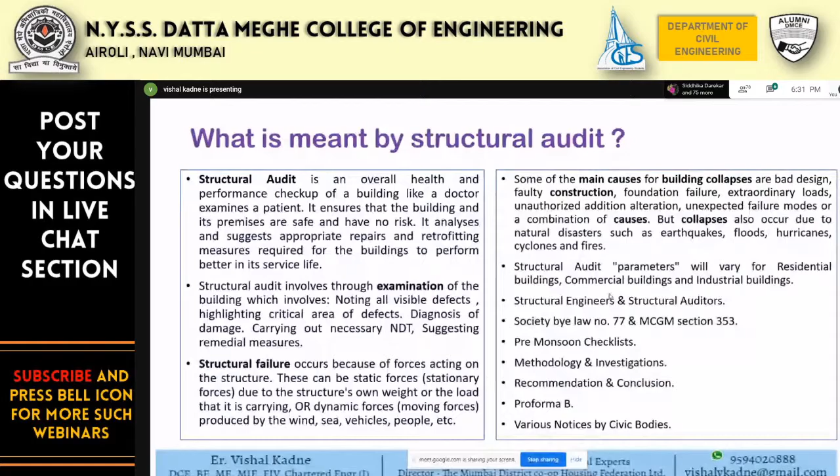Now we'll move to the next slide. Let us start our main agenda, the structural audit. This is part of the pre-process. Before starting the structural audit, we must get ready with the pre-monsoon checklist, covering the different factors that can be root causes or reasons for the damages.

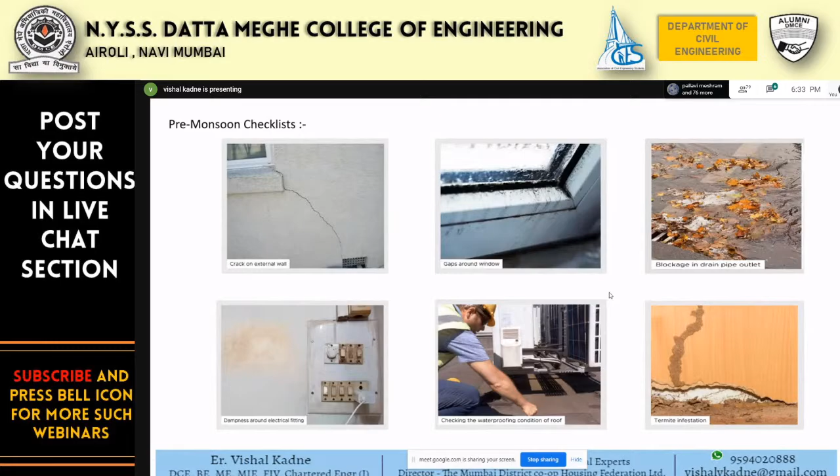Dampness around the electrical fittings, checking the waterproofing condition of the roof, termite infestation. This is the second page of the pre-monsoon checklist. Leak in the roof, vegetation growth.

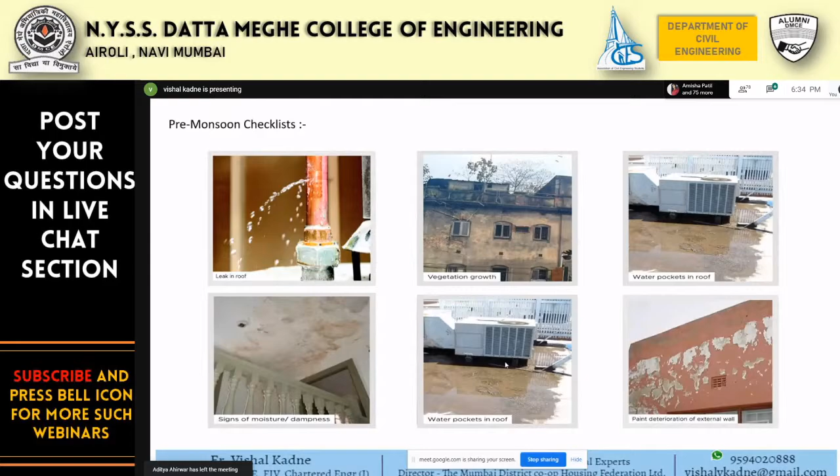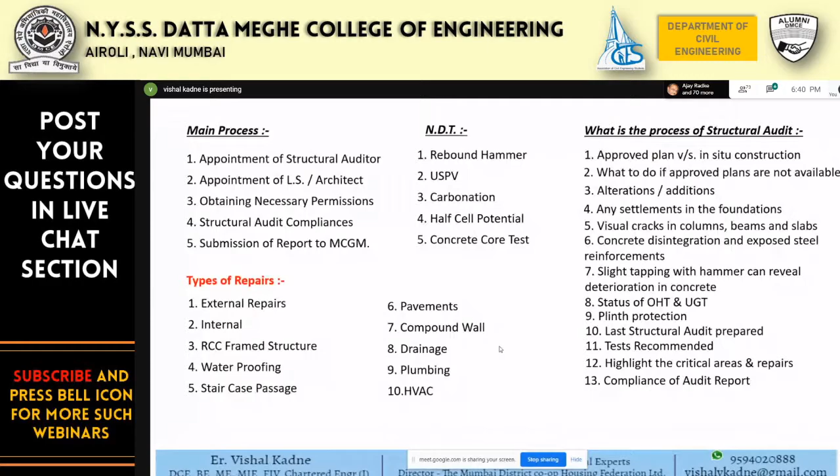Now here I'll try to show you a rebound hammer test. These videos are all available on my YouTube channel.

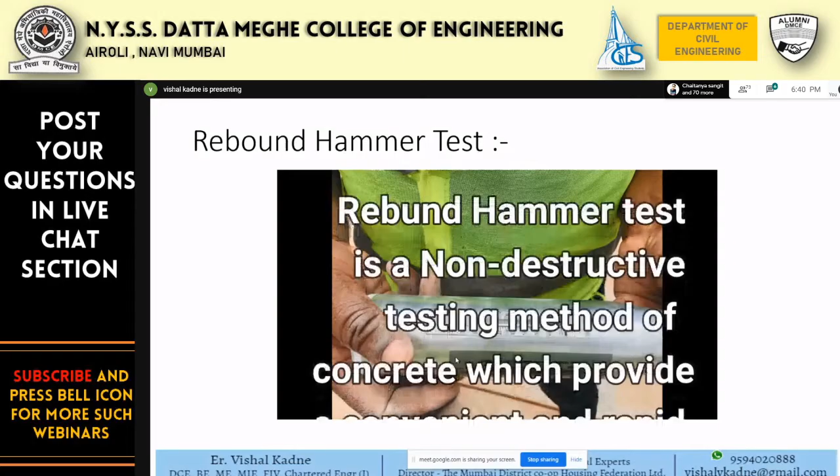Let us go with this rebound hammer test. I hope the video is playing properly. Yes, sir. This is the rebound hammer.

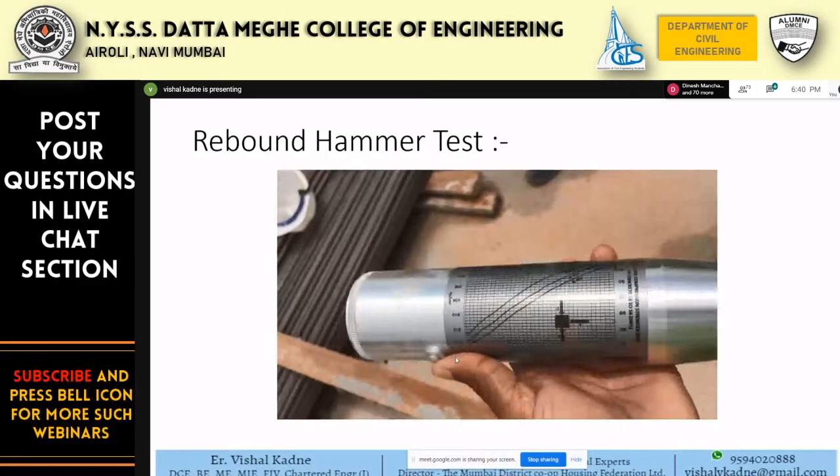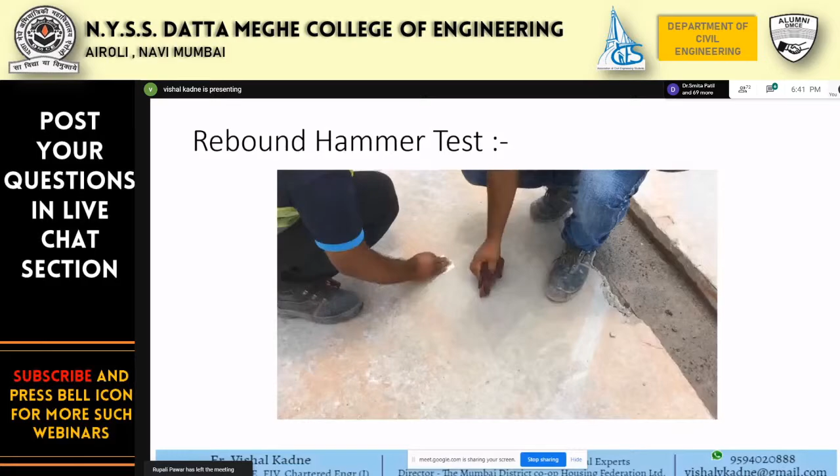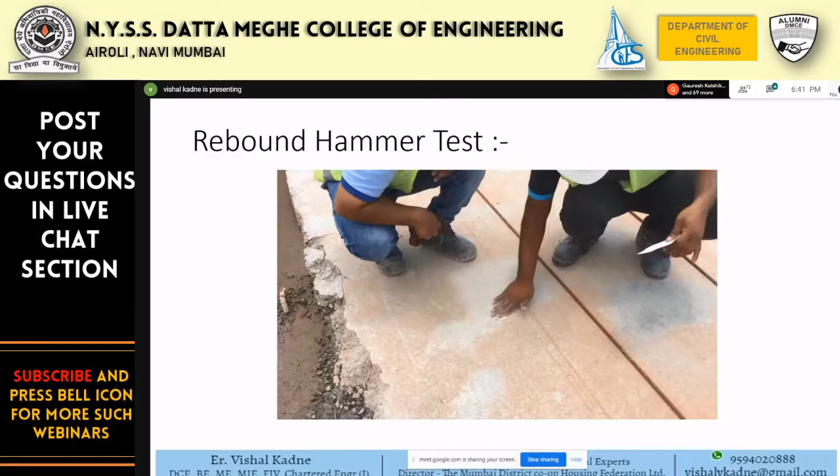And the procedure of the rebound hammer test. These are all actual videos when we perform the test. You can see our engineers are ready with PPE, safety shoes, safety jackets, and safety helmets. He's cleaning the surface, and now he'll mark the test point. The surface should be neat and clean.

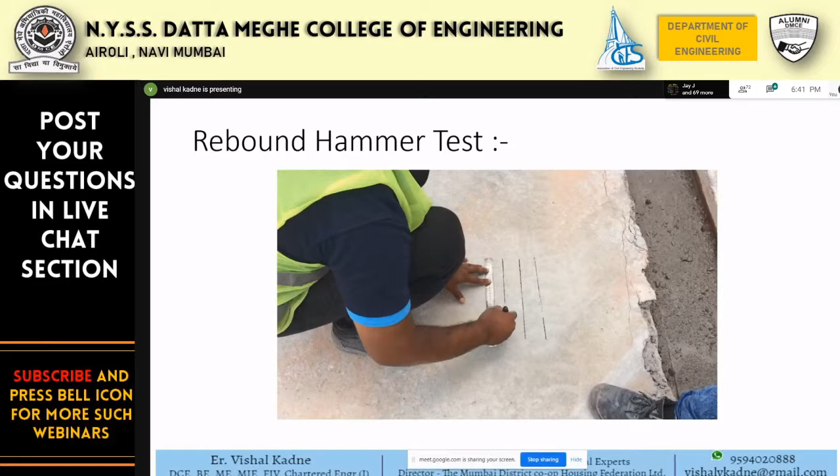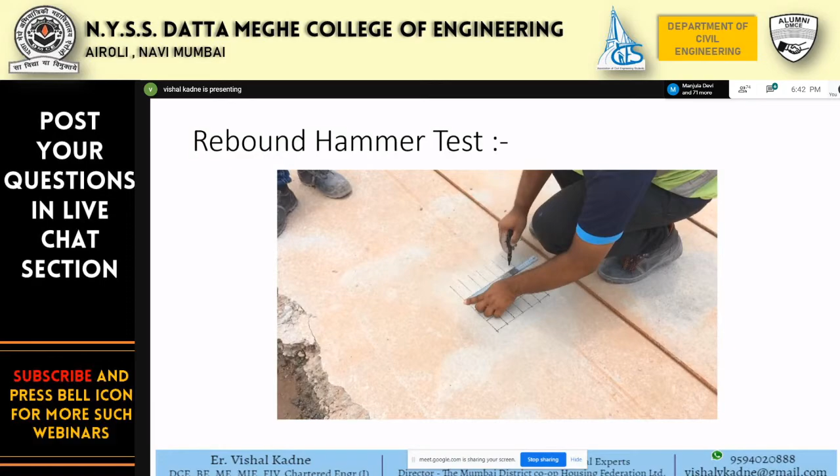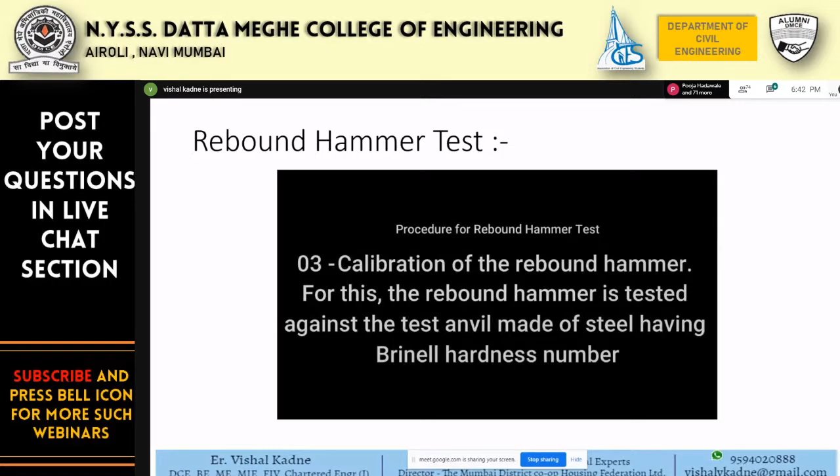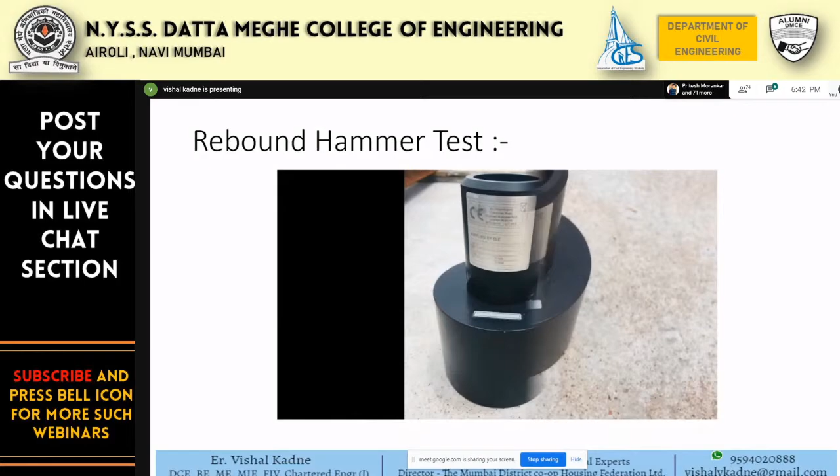Now, calibration. Calibration is one of the important processes before starting any test. You must be aware of the calibration of your UTM machine when you do compressive strength. The least count is 2 units, plus or minus 2 units.

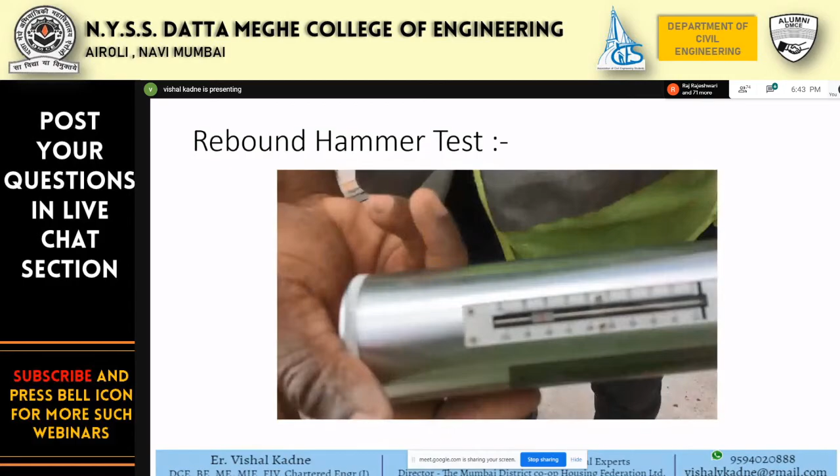So the test anvil reading is 82. Now we are ready for the test.

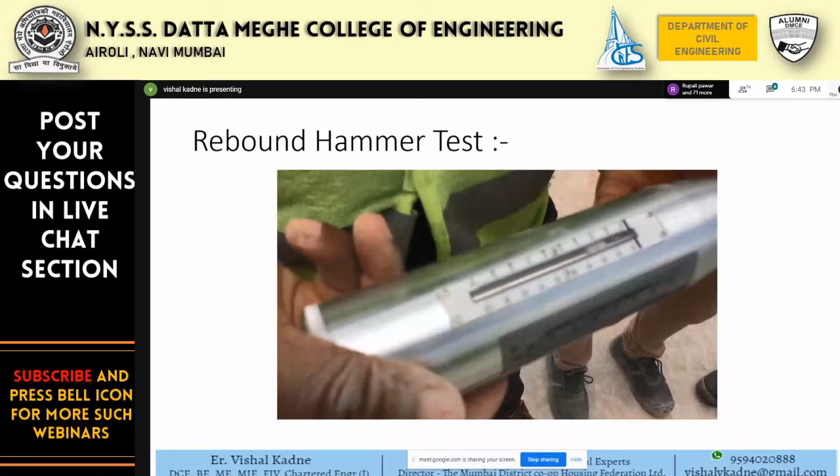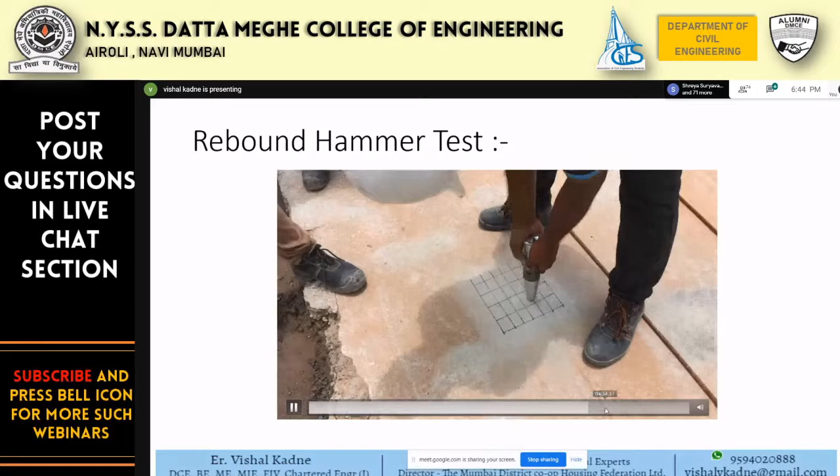First reading is 31. Second reading is 32. Similarly, we have to take all readings. In each slot, we'll be taking the readings. I'm just forwarding because it's a repetition. Now finally take against the test anvil value.

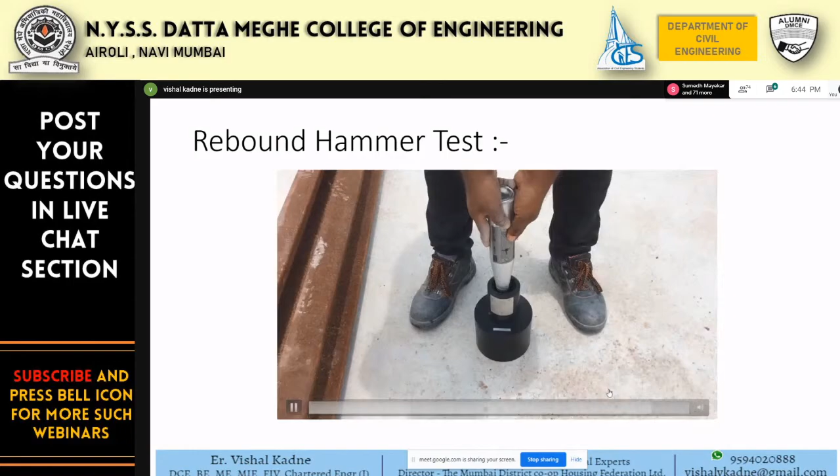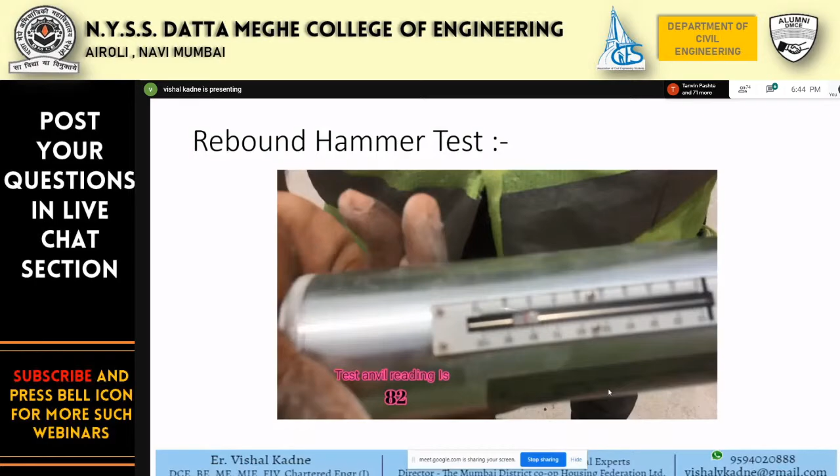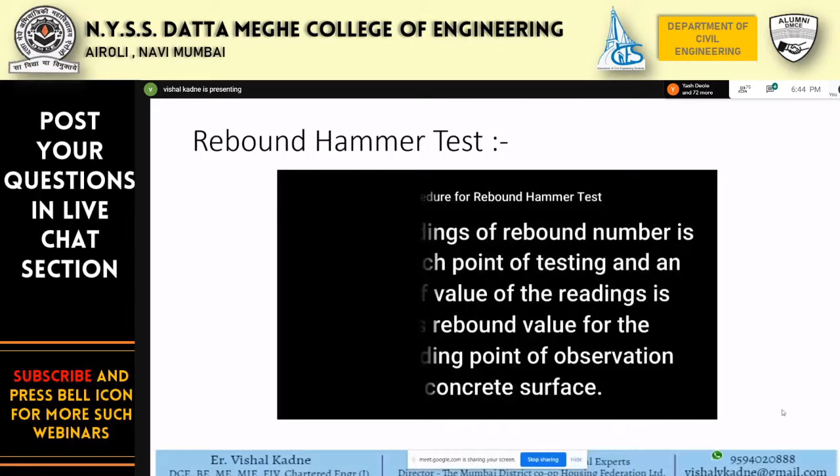10 readings of rebound number are taken at each point of testing, and the average value of the readings is taken as the rebound value for the corresponding point of observation on the concrete surface. So these are the rebound hammer test results that we performed, and we got an average value of 30. This is one of the important tests in NDT, non-destructive testing.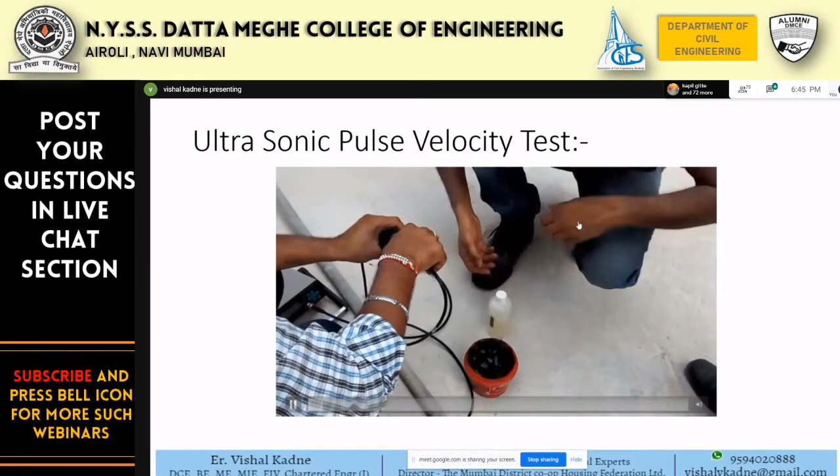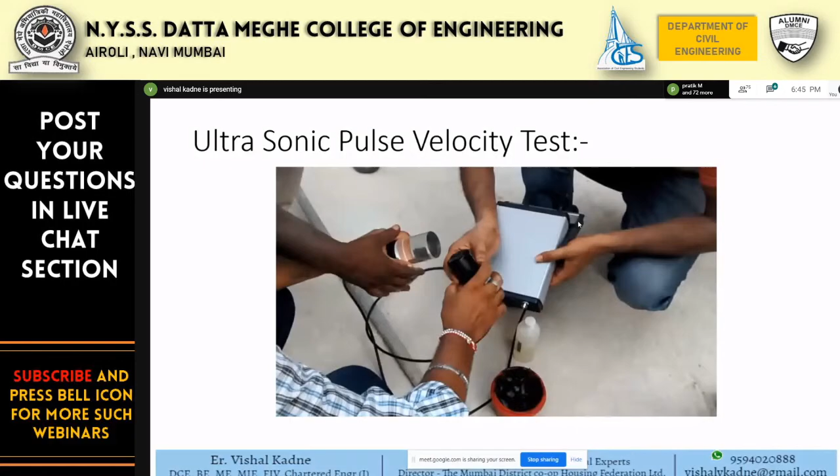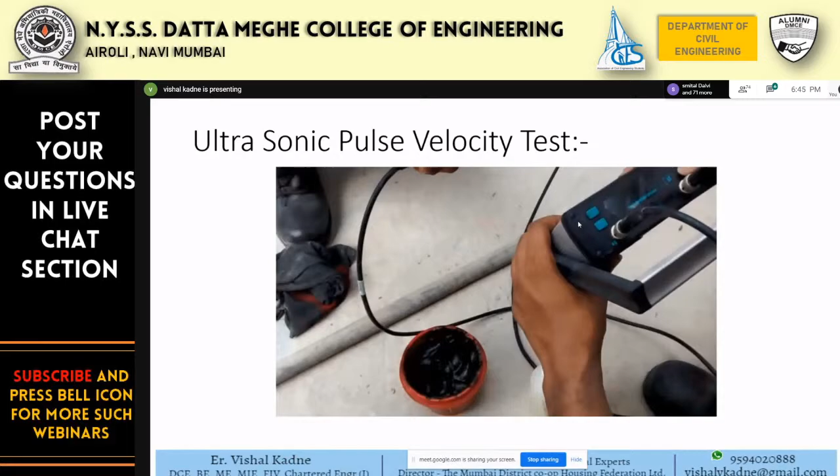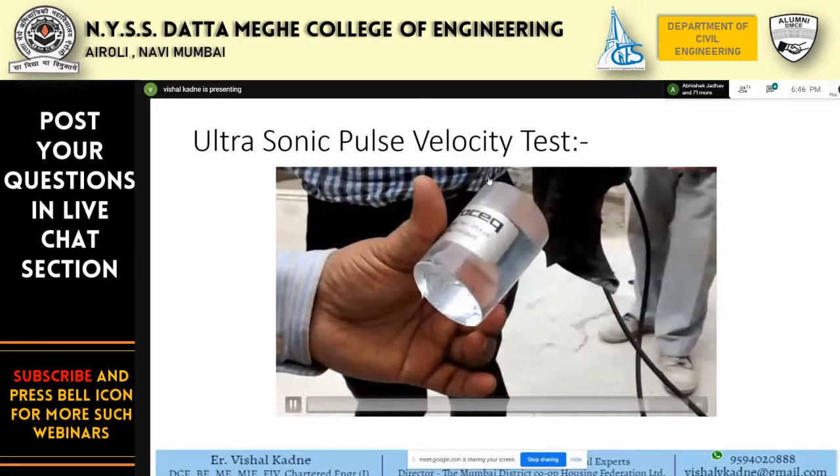In the second slide, this is the ultrasonic pulse velocity test. This is the velocity of the ultrasonic pulse passing through the sample. This test is used to understand or identify cracks and hollowness by passing an ultrasonic pulse through the concrete surfaces.

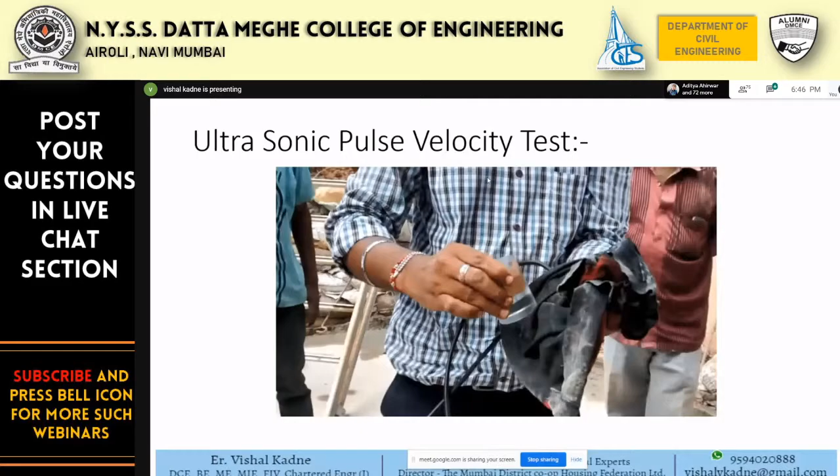This is a carbonation test. This is a detailed process for the test. You can see the color changes in the sample. These are all concrete samples extracted from existing sections of the building.

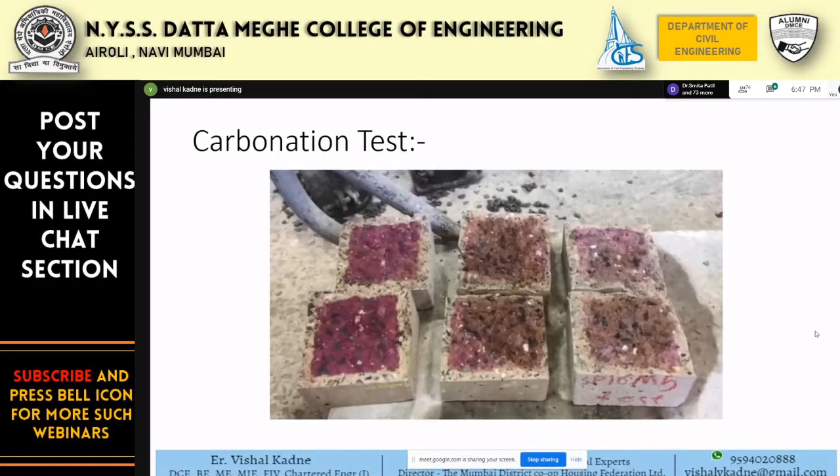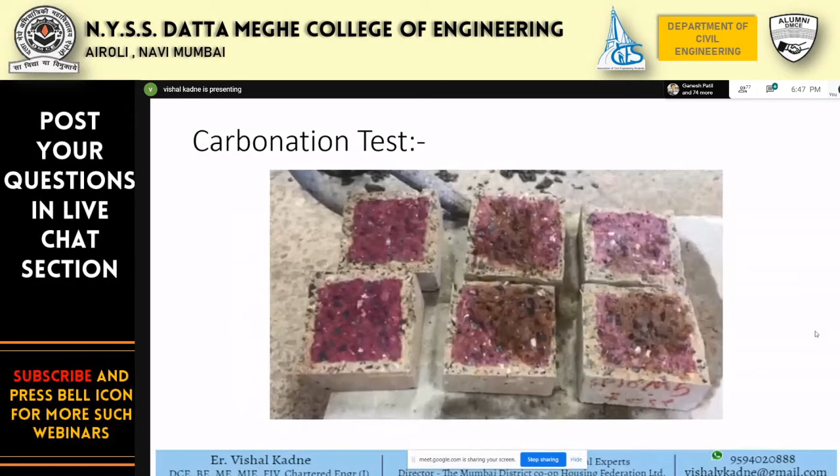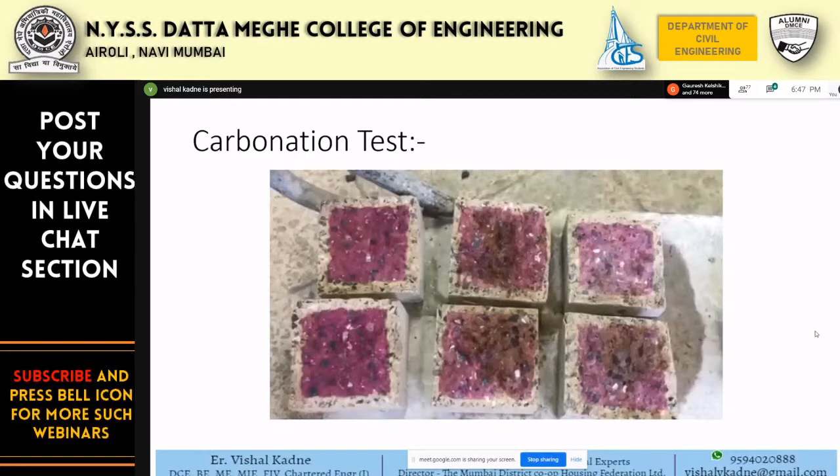Naming of the sample is one of the important tasks and factors, and placing of the sample is also important. You can observe changes in the color of this extracted sample. So this was the carbonation test.

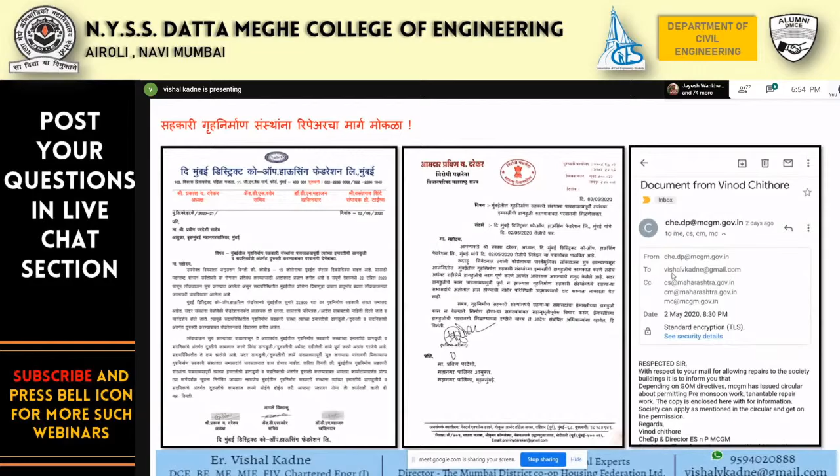So the EODB has made life easier for housing societies to obtain permission during this lockdown. Here are a few guidelines for your kind information, for those who are interested to perform the structural audit, to get the structural repairs done during this lockdown, and how you can proceed.

And this is a circular issued by Mumbai Municipal Corporation. The guidelines are almost the same for most corporations except for a few certain clauses. BMC has divided these guidelines into two different issues: one is ongoing construction for new buildings, and the other is structural repair works in all buildings which have already commenced.

Waterproofing works, all tenantable repairs like external plaster, internal plaster, plumbing work, and work specified under Section 342 of MMC Act. Section 342 of MMC Act is one of the big chapters of the MMC Act.

I used the words unauthorized addition alteration and authorized addition alteration. Whatever work has to be performed or executed in a building, it has to get approval from MCGM or any local corporation. So all miscellaneous approvals come under Section 342 of MMC Act.

After applying through this section, we get permission. What type of permission do we get? Here we can see one of the permissions that we got recently for one of our projects in Chembur.

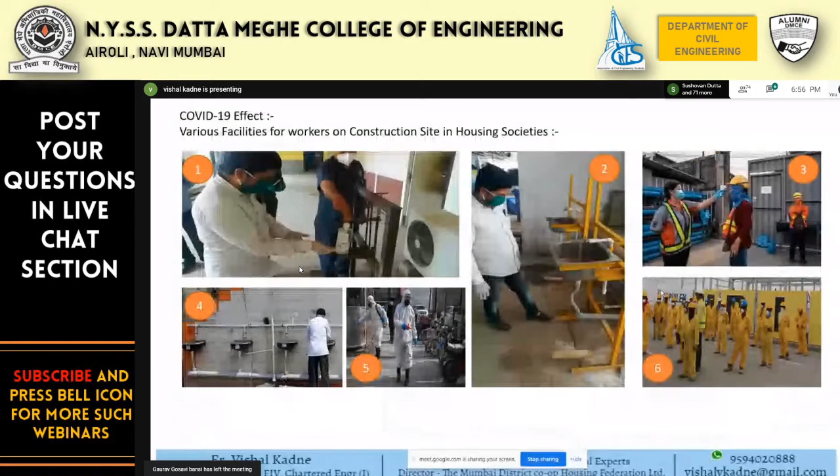So you have to go through all these guidelines before suggesting, before concluding your remarks. So this was all about the structural repairs. Now, these are some recent guidelines on various facilities for the workers on construction sites and in housing societies, what type of facilities we have to provide.

See here, hand sanitizer, a pedal sanitizer foot-operated machine is there. Then you can see the wash basin is connected to this foot-operated spring, and we need not touch a tap or anything, and this tap is operationable. And here we can see the thermal screening is going on, social distancing is followed, the wash basin facility is there.

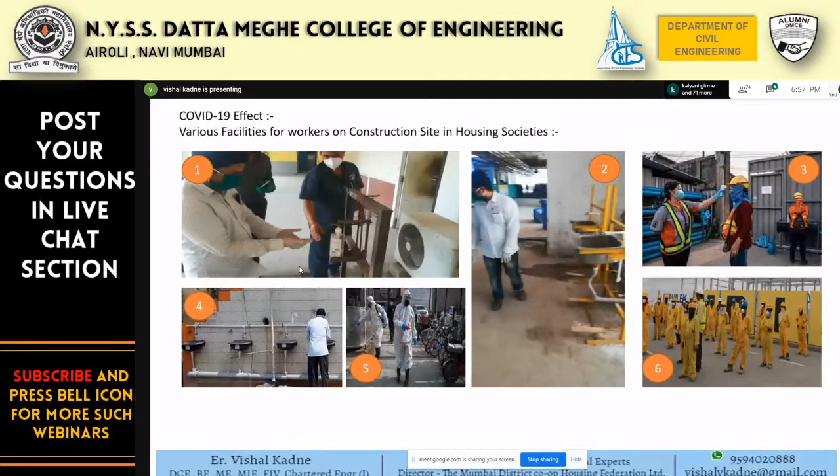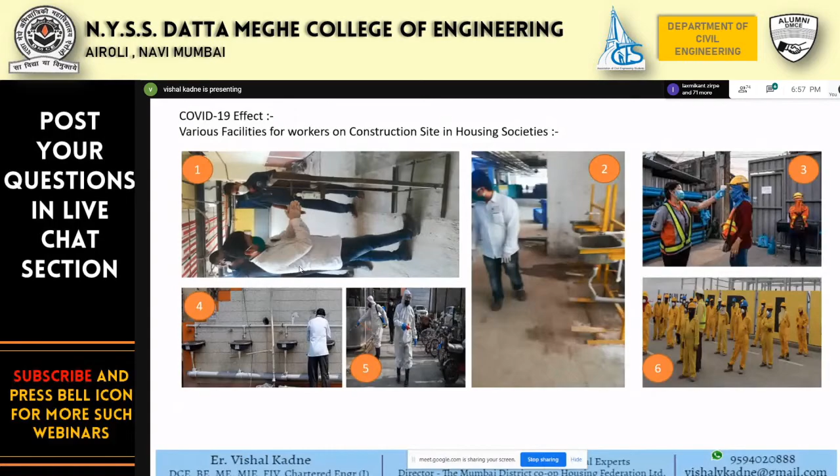Then sanitization is provided into the fifth image. So this is all about, before we conclude, how to proceed during this COVID-19 effect, how our life has been changed due to this COVID-19. So these are all photographs of a few sites.

So this was all about the structural audit and pre-monsoon repair. We tried to cover some basic work so that it won't be tough for you to represent or to understand the things. Now the call is yours.